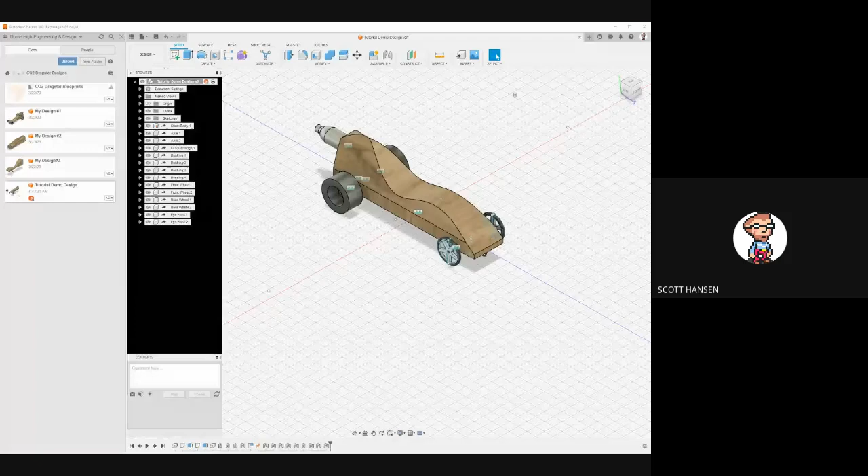In this last step, we're going to take our dragster body. It's now been refined, it's fully assembled, and we're ready to actually create the blueprints for our design. There are two parts of the blueprints I'm going to ask you for. There is the assembly view showing the bill of materials and all of the parts from an isometric view, showing how all those parts fit together. And then I want a multi-view drawing of the actual body itself, ideally with a 1-to-1 scale so we can see precisely how big different features of your CO2 Dragster body are in order to fabricate those designs in the workshop.

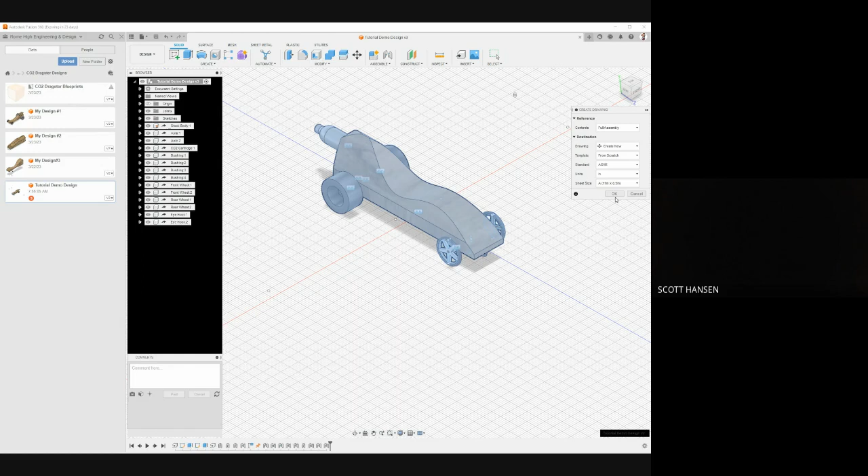So to get started with that, I'm going down to drawing. I'm going to create a drawing from design, create the full assembly, and create a new drawing. ASME is a perfectly fine format to use, and I'm going to change the sheet size down here to 11 by 8.5 inches. That'll be kind of like landscape view for my drawing page, which will make it a little easier to represent this relatively long design. So let me click OK.

We'll wait a couple seconds. It's going to create that detailed drawing, and you'll see that drawing show up in your student folder as well.

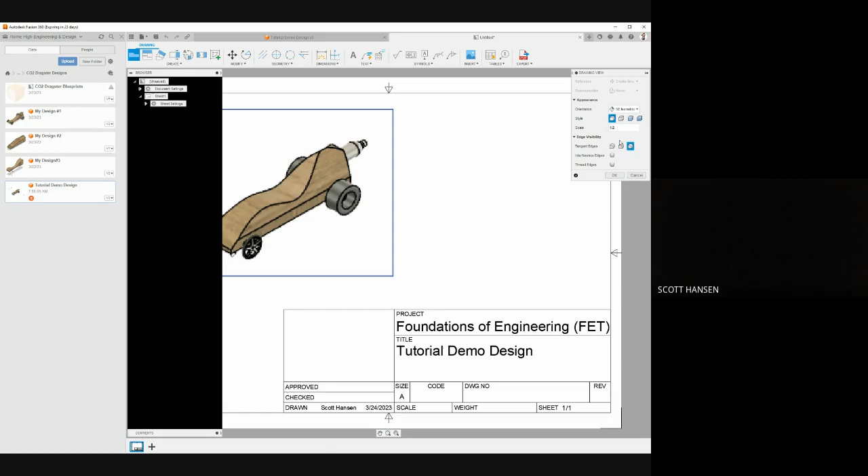Before I insert my base view for these blueprints, I'm going to change the orientation for this first view to an isometric view. That's looking a little bit small, let me change the scale here to 1:2. That's, I think, a little better for my assembly view. I think everything else looks fine. Click OK, and then right there inserts the assembly view.

Let me go over to tables. I'm going to grab a parts list, snap that to this top right corner, and that's going to insert the parts list. I'm going to make a few modifications to this table, so let me double click that. I want to grab all levels of my structure, so I'm getting, even if there are some sub-assembly parts, that's going to give me all the parts in my design.

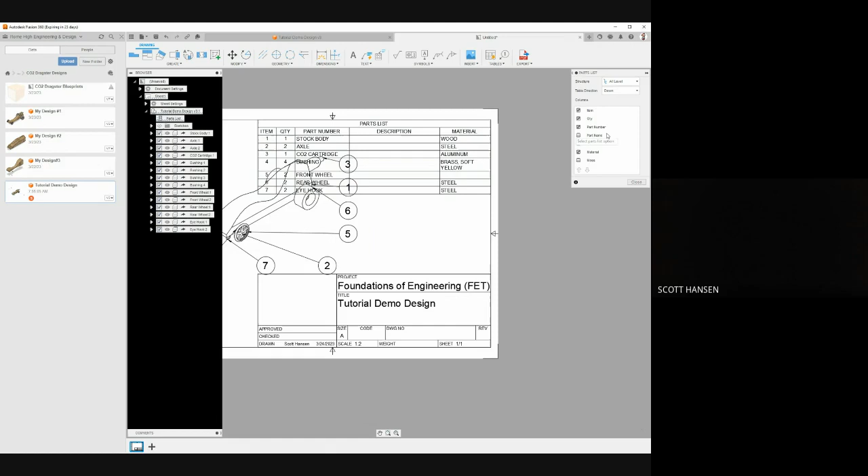I'm going to turn off material and description since I'm not really using those in this particular parts list. All right, let me click close, and there I have my assembly view with a complete list of parts used in my design. Those parts are labeled by item number, identifies the quantity that I need for each of those parts, as well as giving me a part number based on the component name, which here is a descriptive name of the actual part used.

You may need to move around these annotations just so it's a little easier to see what's pointing to what. But for our purposes, I think that should be simple enough to create the assembly view. So that's the first thing that's going to be included in our set of blueprints.

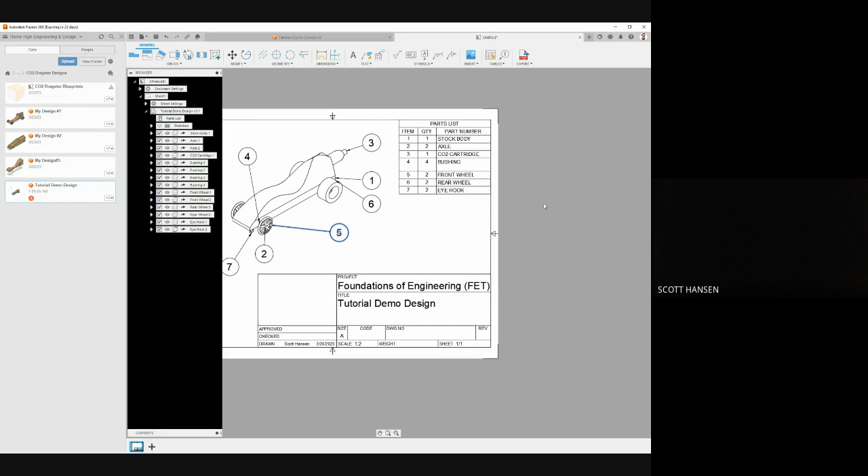Let me go ahead and save that. I'm going to call this tutorial demo design blueprint, since I'm including more than one detailed drawing. Let me save that. Now, what I want to do is add another drawing sheet to this set of blueprints.

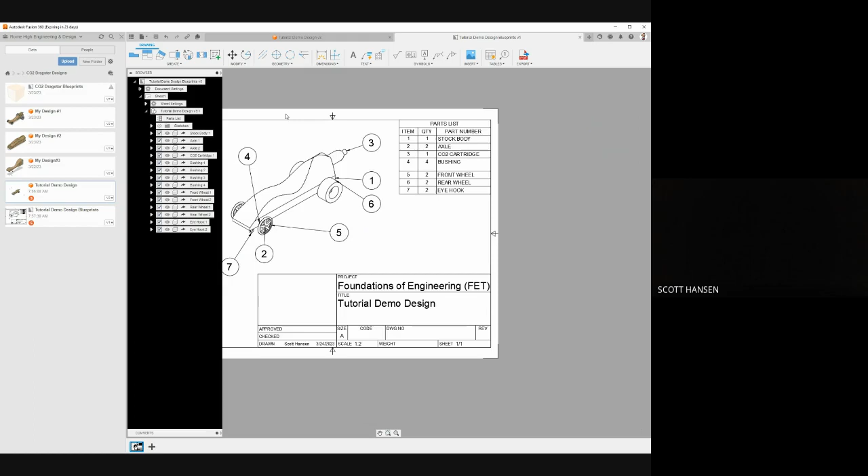That contains just the dragster body. So I'm going to go back to my design file, do the same thing to create a drawing. I'm going to create a drawing from the design, but instead of creating a full assembly, I'm going to select a specific part to create a drawing from.

I'm going to go over to my components list and grab my stock body. Now that I've got my stock body selected, where it says create new, I don't want to create a new drawing. I want to add that to my existing blueprint.

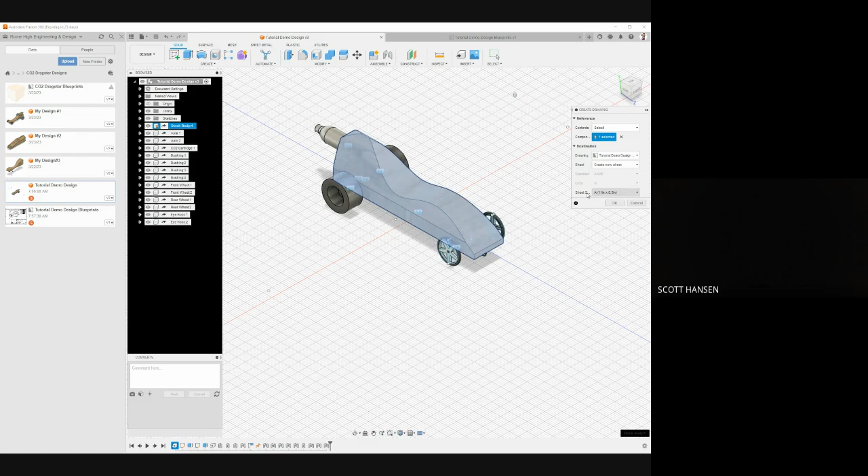So I'm going to select my blueprint file that I just created, same format, and keep the same 11 by 8.5 inch page layout. You'll notice at the bottom it adds another tab to your drawing sheet to create a second drawing sheet. To place the views of my CO2 Dragster body, I'm going to start with the right side, since that's the most informative in terms of the features of my design.

I'm going to change this to a 1:1 scale, which should just fit on my drawing sheet. All right, perfect.

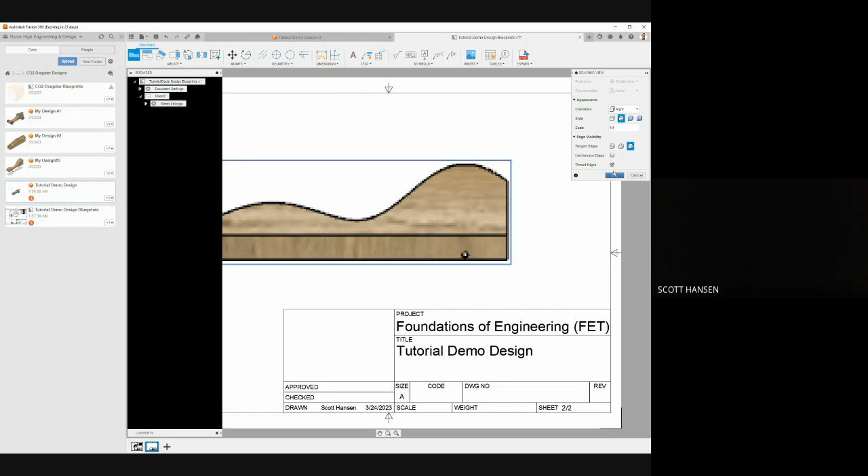The reason I want to use a 1:1 scale is because that will let me, if I need to, especially with complex curves I want to follow to fabricate my physical model, print it out, cut it out, paste it on the side of my stock body, and use that as a guide or template to refine the final design. So if you can fit a 1-to-1 scale on your drawing sheet, that's ideal for actually using your blueprints.

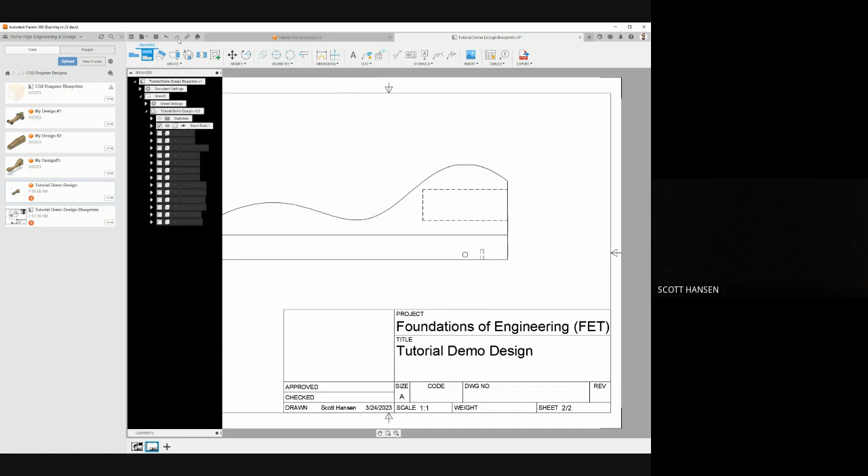We can create views for the rear view and the top view as well using this projected view. All you have to do with the projected view selected is click your parent view, your base view. If you go over to the side, that'll default to the rear view, and if you go above that, it should default to the top view. Click that little green check mark, and you've placed your views.

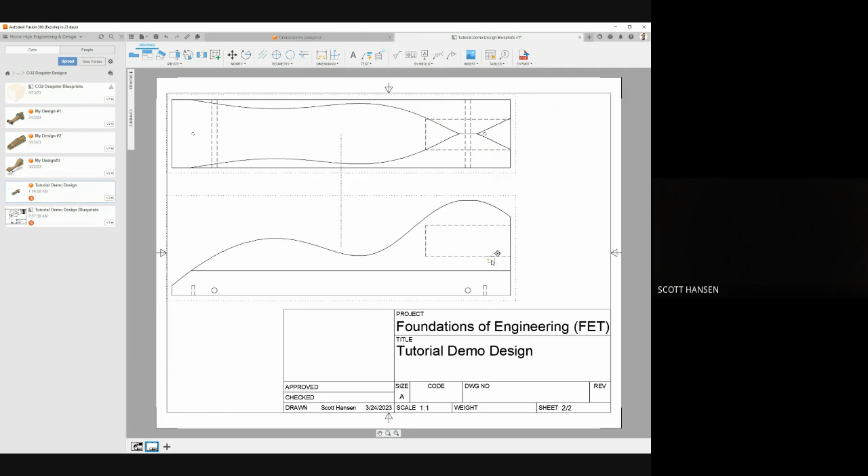It may require a little moving things around to space things, especially with this 1-to-1 scale, because it will be pretty tight on a single 11 by 8.5-inch piece of paper, but it should fit if you're using the stock body. Before we finish our blueprints here, we do want to add some dimensions to this design.

I want to know exactly how big the features of my design need to be. Things we might want to include are the length, the height, the position of holes I need to drill. If I need to drill holes for the wheels, I need to know where those holes are going and the diameter of those holes.

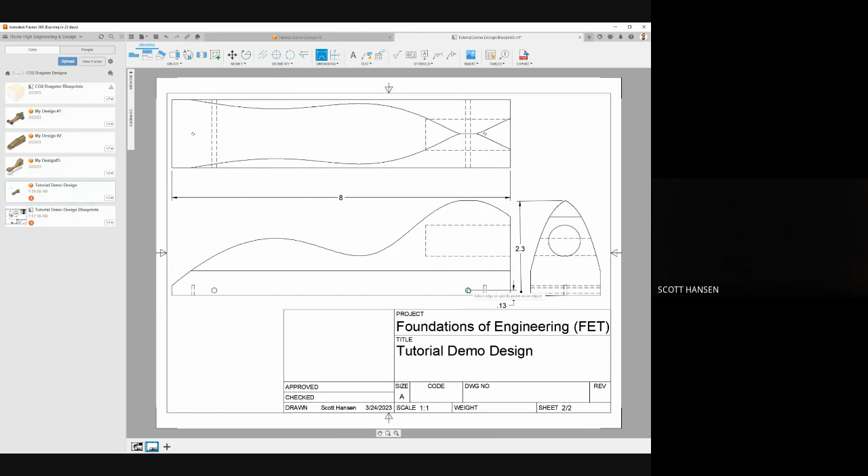If you have other features you're going to need to implement on your design—I want this nose of my vehicle to be about 1/8 inch—I can include that, the positioning of where the eye hooks are going to be, anything that gives details on how to take this to the workshop and actually create this model. So add some dimensions, and that's going to give us a nice, professionally formatted, detailed drawing of our CO2 Dragster.

Your set of blueprints should have 2 drawing sheets: the assembly view, as well as the detailed drawing of the body of your racer. If you do any other custom design parts, I'd love to see you add detailed drawings of those custom parts. You do not need to add detailed drawings for any of the stock parts, just the things you are going to custom design and modify.